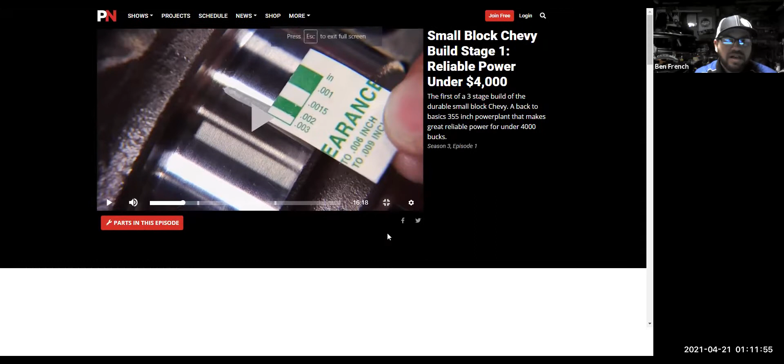So what are we looking at right here? We're deep inside an engine, looking at the crankshaft. I wanted to point out this little piece of paper and this smashed piece of wax - that's called Plasti Gauge. Basically we're measuring a thickness here that's somewhere between 2 to 3 thousandths of an inch, which is about the size of your hair. If you plucked a piece of hair out of your head and measured it with a micrometer or a dial caliper, it would measure somewhere between 2 to 3 thousandths. So when you're building engines, that's the size of stuff you're measuring.

So let me play this for just a real quick second. I know it's going to be a little choppy - we won't play more than 30 seconds or so.

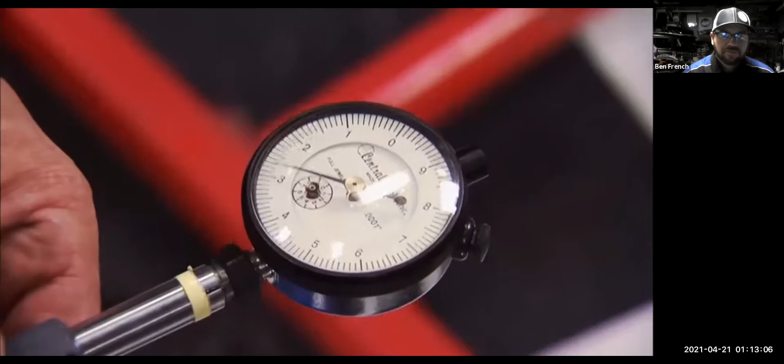Tolerance: our reading is between 2 and 3 thousandths. Now the crank comes out, and with the cap installed and the bore gauge set to the crank's journal, we'll verify the Plasti Gauge's accuracy. It measures 27 ten-thousandths, and that's within a half thousandth of our range.

The problem with a lot of these Saturday morning engine building or automotive shows is they do everything super fast and make everything look super easy. They do that to keep it entertaining and make it look like, hey, you could do that at home.

In this picture, this guy's got thousands of dollars worth of specialty tools. The engine he's building is a small block Chevrolet. In his hand he's got a dial bore gauge, and he's also used a micrometer. What I'm getting to is that if you're going to be building engines, a lot of people think it's just slapping parts together, but it's a lot of cleaning, a lot of inspection, and a whole lot of precision measurement.

So that's tonight's topic, precision measurement. It may not be the most exciting, but I'll tell you what is exciting is when you build your own motor and hear that thing fire up for the first time. It's like a life-changing experience. So whether you're the hot rod enthusiast doing stuff at home in your shop, or you're going to be a professional, if you're going to be doing work like this, you have to get good with precision measurement.

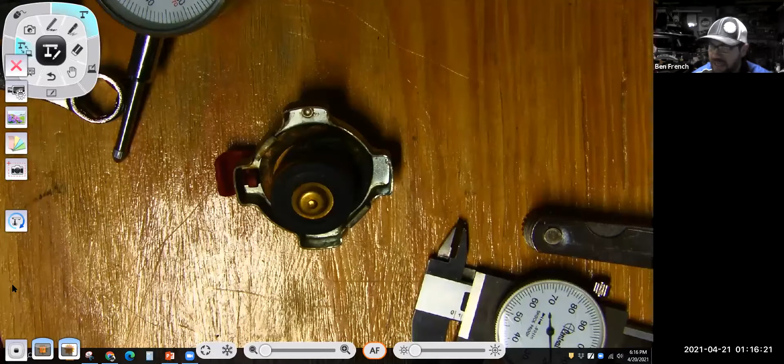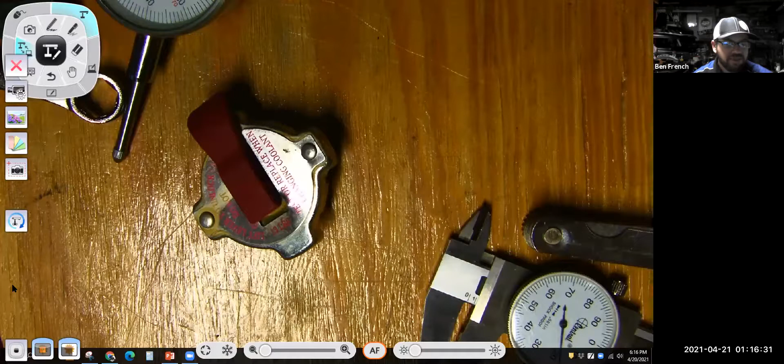Oops, look, I got something up on the screen. What is this right here, guys? What am I looking at? I saved this one just for you guys because we were talking about this last week or the week before. What is this thing right here, gang? You guys tell me. This thing, not all this other stuff. Not everybody at once now.

You're killing me. This is a radiator cap, okay? And I said if you're doing a cooling system inspection, always inspect your radiator cap, and if it looks sketchy at all, replace it. I also said I hate this style, with this little lever on it that you can lift up, because what happens is people see that - if I zoom in on it, you'll see it even says on there, lift up. And they see that and they go, oh, my car's overheating, oh, I'll lift up on this. Once you lose the pressure in the cooling system, it definitely begins to boil over and people burn themselves and cause all kinds of problems. So I would never recommend one of these styles of cap, especially for a customer's car, because it seems like it always creates problems.

Secondly, look at the gasket on the bottom of this. I actually had an issue where this was off of my Spec Miata race car and it was getting hot out on the racetrack. I was seeing the temperature increase, and of course this was back in January, February, so it was not hot outside, but the engine was running kind of hot. I was losing some coolant on the car - I could tell I was leaking, and when I looked in the radiator, I could tell it was low. So I figured, okay, that's why it's getting hot, it's because it's low on coolant. I was pressure testing the system, and I had bypassed looking at this, and that was a mistake. Once I realized, oh, this gasket's torn, that was my problem right there. The system would pressurize, it would blow through that seal, leak down the side, kind of leak where the lower radiator hose was, where the coolant dripped off the side of the radiator, and threw me for a loop. So if you're servicing your cooling system, if this cap looks sketchy, replace it.

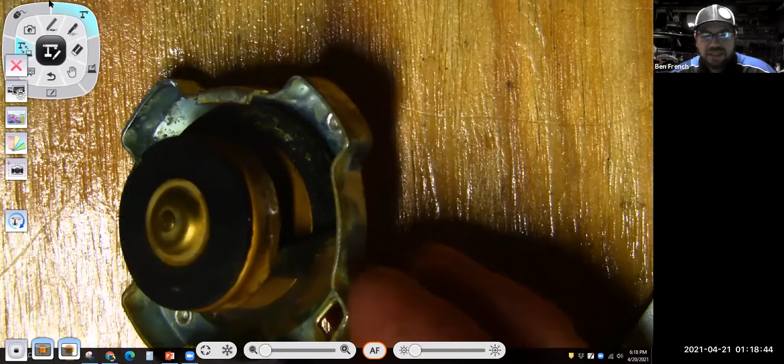All right, now back to precision measurement.

When it comes to measuring stuff, it doesn't hurt to start with a ruler. Let's get that up on the screen.

I grabbed this little one because it's a fractional ruler, not metric. It takes that inch and divides it up into 8 segments. So if I look at this, I'll start right here: 1/8, 1/4 of an inch, 3/8, 1/2, or you can look at that as 4/8, reduced down to 1/2, 5/8, 3/4, and 7/8.

So they've taken the ruler and divided it up into 8 sections. But in between those 8 sections, there's smaller sections. So there's 1/8, but right here is 1/16. And then below that is 32nds. So it's 1/32, 2/32 which is 1/16, 3/32, and 2/16 divides down into 1/8.

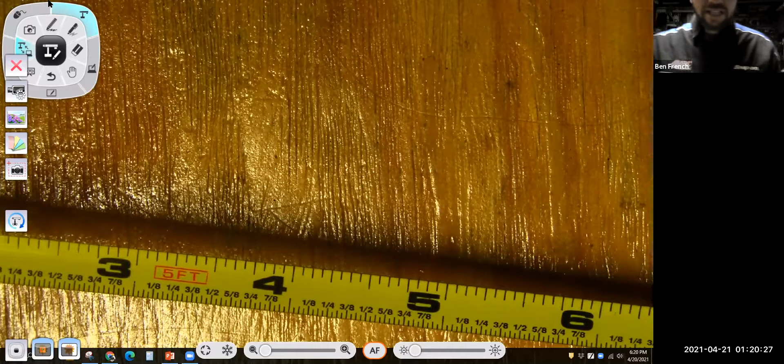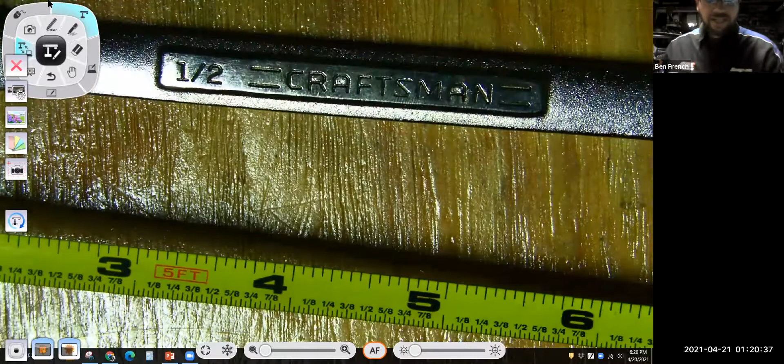The fractional system is kind of weird, and for folks who don't like fractions, that can be frustrating. But I want to relate it to a tool we've talked about, wrenches. Let's flip that over. That's 1/2, so that directly relates to that measurement right there.

Now this is your typical tape ruler. What I wanted to show you is if you're working in the machine shop, you're likely to carry around one of these, a machinist's ruler. If you're doing machine work, you measure stuff a lot, and you usually want a finer scale than your typical ruler.

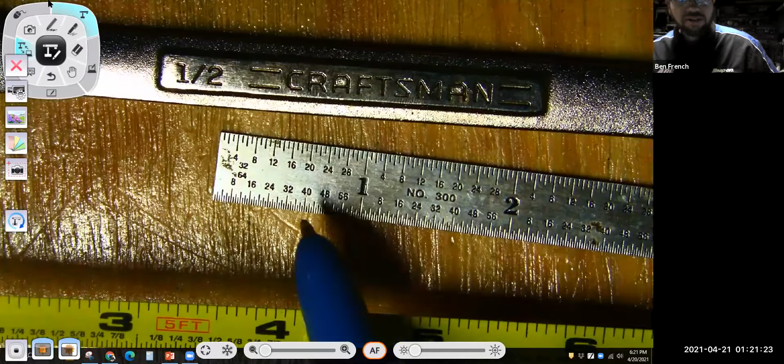The smallest scale this guy went down to was 32nds of an inch. If I move him over, he measures 32nds of an inch at the top, and the bottom scale goes down to 64ths of an inch. That's so small, without my glasses I can't even see it. But that's still a much coarser scale than some of these other tools I'm going to put on screen. I do think everything builds.

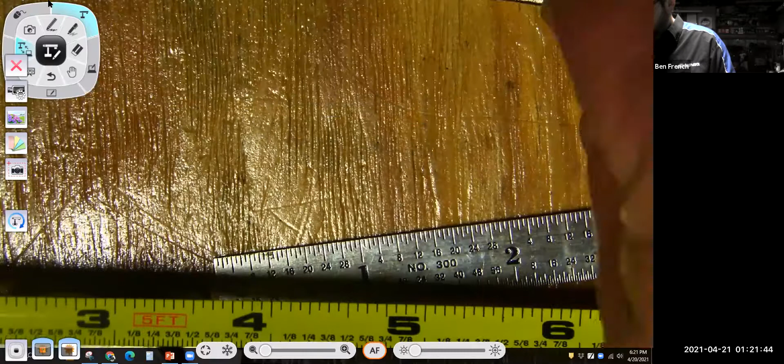One thing we do in machine work is take this inch fractional system—if you're working on import engines or other things, you might be using metric tools. But I also see a lot of machine shops that use a mix of both metric and standard, and the technicians, machinists, and builders just get used to using both of those things. So here I have a dial caliper.

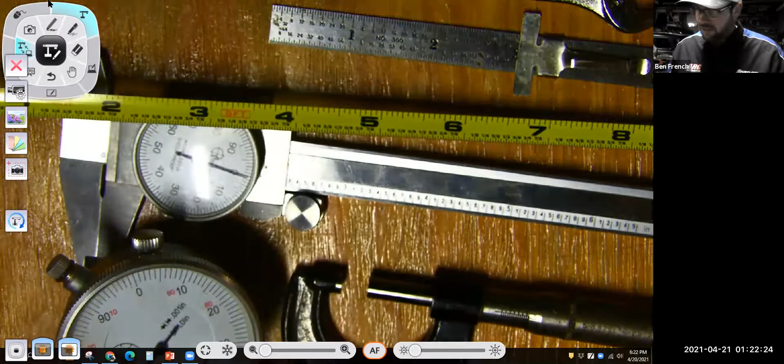And then below that, I have the infamous micrometer. So I've got a little bit of everything here. I also have a dial indicator, and all kinds of specialty gauges and stuff up there.

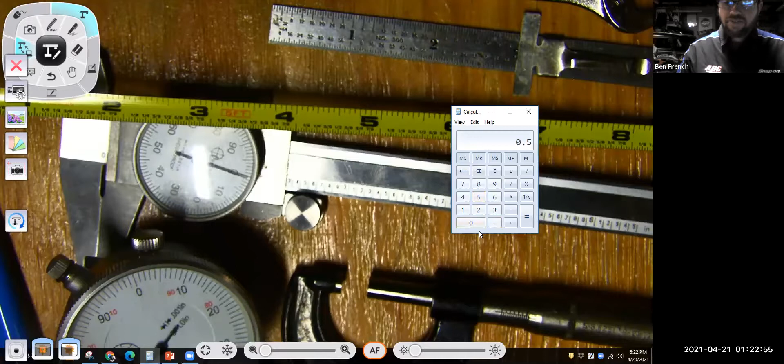Let me do one thing here while I still have the rulers up. I'm going to put up my calculator. If I take 1/2 and divide it out, 1 divided by 2, I get 0.5. Now I could also say 0.500, or we could say that's 500 thousandths of an inch.

So by dividing out the fractions, whatever they are, let's say it's 7/8 of an inch—that's 875 thousandths. Let's say it's 9/16—that's 562 thousandths and 5/10, or 5/10 thousandths, is how we would say that. In the machinist world, we typically talk about stuff being in thousandths of an inch.

How do we get from fractional, fractions like this or on our measuring tape, to decimal points? We just divide out the fractions. When you do that, it makes stuff a lot more straightforward. So let's take another one.

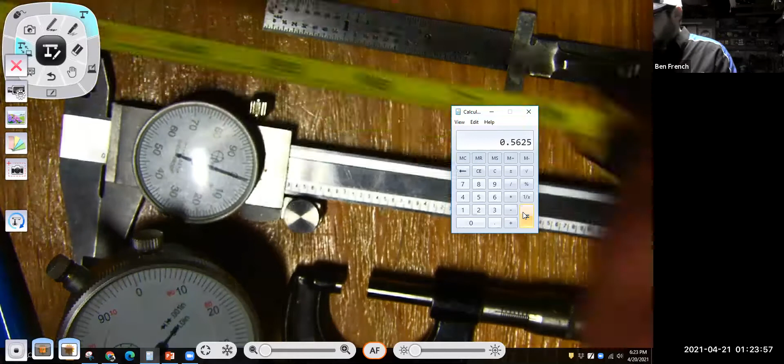Here I have a wrench that's 7/16. Well, what is that going to be? 7 divided by 16—okay, that's 437 thousandths and 5/10, or 5/10 thousandths. So that's how you get that to a decimal point.

Now I want to show you another trick. There's one magic number I have memorized over the years, and that is 25.4.

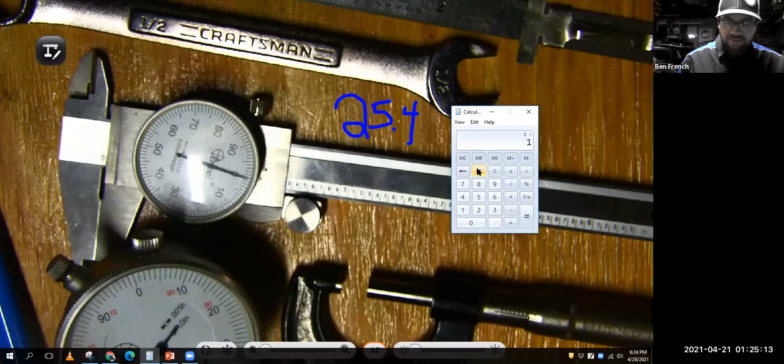Now, what's the deal with 25.4? Well, if I want to go from standard to metric, all I have to do is remember 25.4. So, for example, let's go back to our 1/2 inch. Is that wrench close to a metric size? Well, I don't know, let's divide it out. I'm going to say 1 divided by 2, or 1/2 inch. Oh, that's right, that's 500 thousandths. I'm going to multiply that by 25.4. And guess what I get? 12.7.

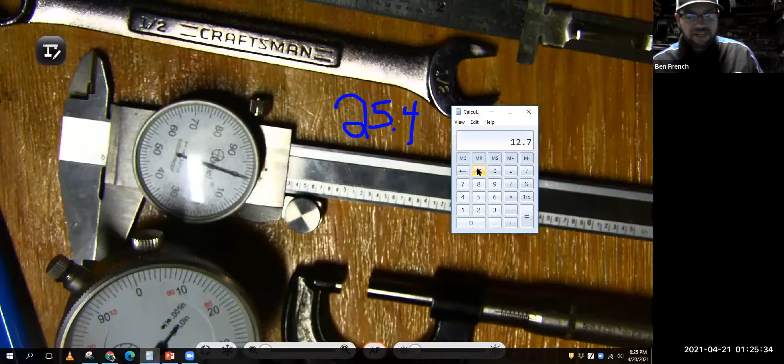Okay, 12.7. So you know what that is? That's really, really close to 13 millimeters, isn't it? And so what you'll find, if you can't find a 13 millimeter wrench in your toolbox, if you have a 1/2 inch wrench that maybe is a little bit worn, it will fit a nut or a bolt that's 13 millimeters. So that is my tech tip for you guys, is that there are conversions, okay?

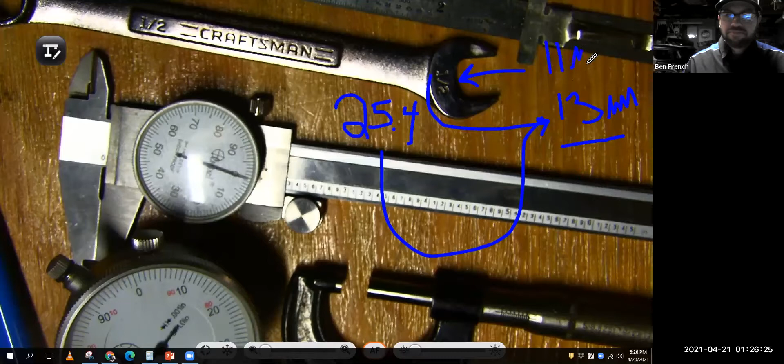And how do you convert it over? You just have to know what's what. So my most popular ones that I use are 11 millimeters, 13 millimeters, and 14 millimeters. I use these all the time. Well, how do I do that? Because if we do the math on them, let's say, for example, we'll go backwards now. We'll say 14 millimeters divided by 25.4. I'm dividing it instead of multiplying it because I'm going the other direction. And I come up with 0.551, or let's say 552.

Well, what's 9 divided by 16? 562. Okay, so 9/16 and 14 millimeters are really close. Likewise, 7/16 and 11 millimeters are really close. So a lot of times you can use those interchangeably. Another one of my favorites is 5/16 and 8 millimeters. Two sizes very, very close to one another. So if you're missing one size of tool in your toolbox, you can usually substitute stuff.

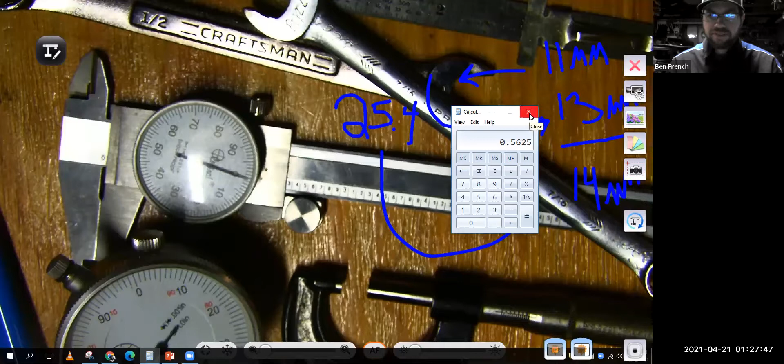So who says that math can't be a help to you, right? We're doing a little bit of fractions, doing a little bit of math, and it's good stuff. So let me clear out some of these scribbles now. And let's really look at our precision measurement tools, okay? So we got the ruler down. Hopefully you know, we even got the machinist ruler down.

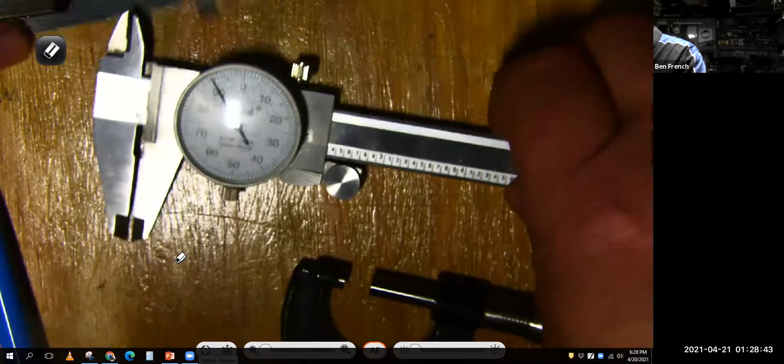And now let's look here at our dial caliper. I'm going to put him up at just a little bit of an angle here so that maybe we take a little bit of that reflection off the screen. He needs to be at more of an angle. Hold on, there we go. Well, I still don't know if that helped.

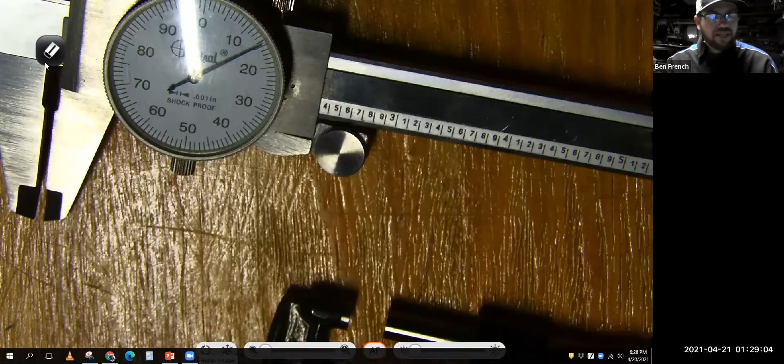So this is a dial caliper, and I love this tool because it does all kinds of measurements. In fact, if I move this guy out of the way, if you zoom in on it, and let's look right here, it tells you on the dial that it measures to the tens, hundreds, thousands. So this tool right here can measure down to the 1,000th of an inch, or 0.001, okay?

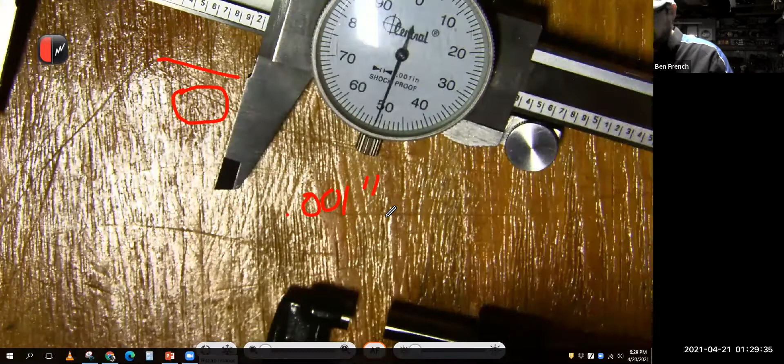But because there are some gear teeth and stuff in here, the way this particular tool works, I'll show you its gear teeth in there. Right there, there's a little bit of slop in the gears. And so what we say is realistically a dial caliper like this is accurate within, oh, maybe 2 to 3 thousandths, okay? So he can measure down to 1,000ths, but his accuracy window is a little bit bigger just because of the mechanics that make this work, okay?

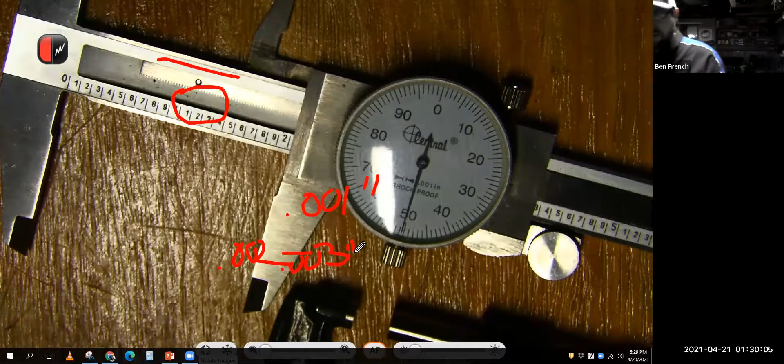But here's what's so awesome about this thing. If I erase those scribbles, get them out of the way, this guy does all kinds of measurements. So, for example, he can do an outside measurement like that. I can clamp down on something and I can measure it, okay? This guy is measuring at, this is right on the 50, but I'll clamp it down.

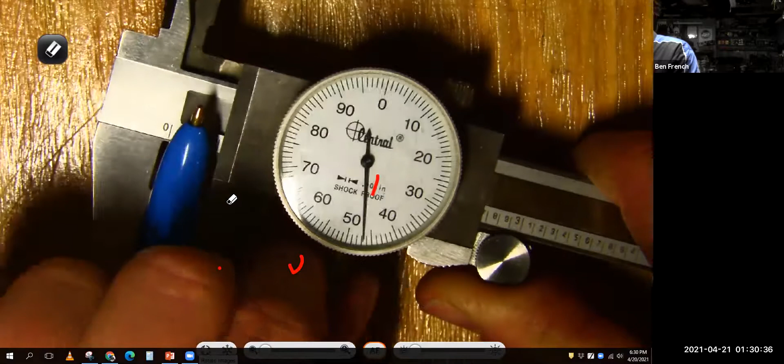Lock it in, take that guy out of there. So he's measuring at 1, 2, 3, 4, that's 450, 1, 2, 3, 453 thousandths of an inch. That's what he's measuring right there. That was the thickness of this.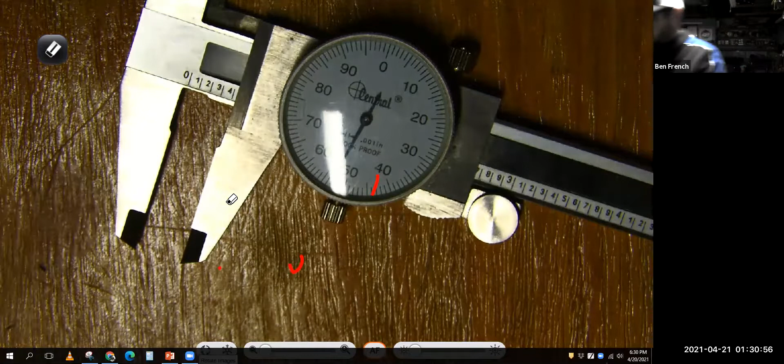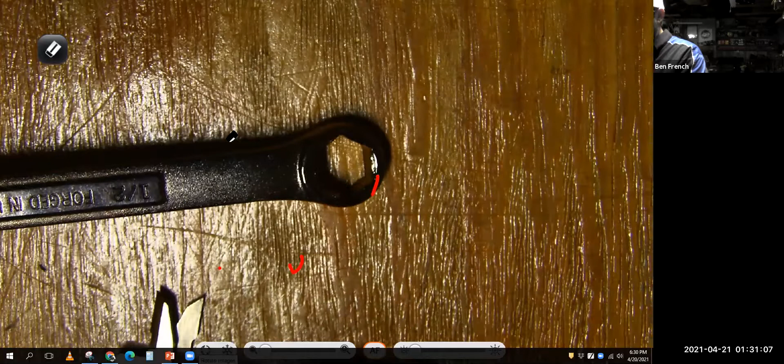But we can also do an inside measurement. So look, imagine this is like a precisionally machined hole and we want to measure how big that is. I can come in there and I can do that inside measurement.

So I can do outside measurements, I can do inside measurements, and I can do a depth measurement. Because on the end of this, it has a piece that extends, right? The tip extends, and I can measure how deep something is and get that measurement.

So this thing has three different types of measurement it can do. And here's a bonus one most people don't know about, it can also do a step measurement on this end. So there's really four different types of measurements you can do with a dial caliper, but it's only accurate within a couple of thousandths because of the mechanics involved.

Now, all that leads me back - let me do a couple of dial type tools. This is a dial indicator. So that was a dial caliper, this is a dial indicator. You can see that this dial indicator reads down to the 1,000th scale. That's the accuracy of that and how fine it can read. So each one of these little lines on this dial represents 1,000th of an inch, and one time all the way around the dial.

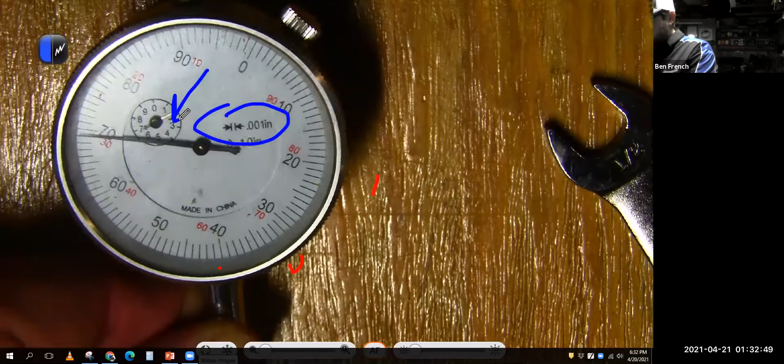So now I've gone around the dial twice, and what you'll notice is now I'm pointed at the 2 right there. So a trip around the dial is 100 thousandths.

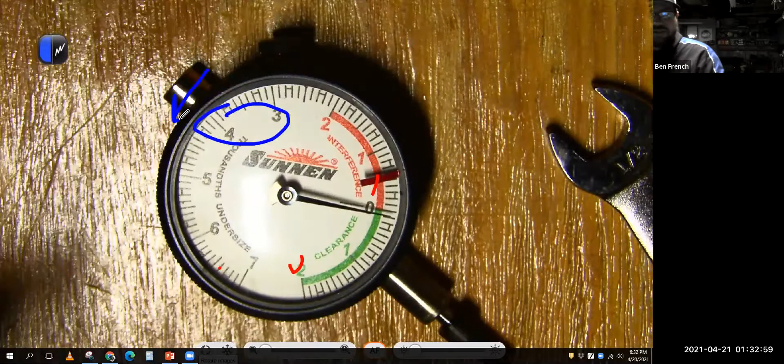Now, this is one of my high-end tools. We use this primarily for reconditioning connecting rods. This is off of our AG300 gauge. This is a very, very fine dial indicator. This guy measures - each big number is 1/1000th, which seems absolutely crazy.

But what that means is that this is 1/1000th, or 0.001. That is 0.002. So each little line in here, like this line right there, that would be 0.0011, or 1/1000th and 1/10,000th. So it measures down to the 10,000th size, and that's how accurate you need to be for something like a connecting rod.

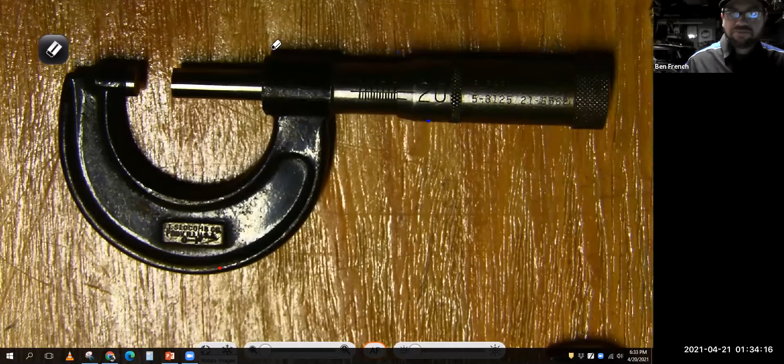So those are those dial tools. Well, what about the micrometer here? The micrometer is kind of like your go-to precision measurement tool. Like I said, a standard micrometer measures down to 1/1000th of an inch, and those thousandths are right on the end of this guy.

Before we get into reading it, we should talk about how does this guy work? Essentially, the mechanics of this, what makes it work so well and be accurate, are very simple - not different than that right there, a nut on a bolt. The frame of the micrometer essentially is the nut, and the spindle and part that you turn to do the measurement is the bolt threading in and out of that frame. So it just has a very, very fine thread pitch inside its nut and bolt.

So one thing I will say about a micrometer is that this is a precision measurement device. It is not a C-clamp, okay? It's a precision measurement device, it is not a C-clamp. Oftentimes what I see is that people will over tighten these things and they don't realize that the threads on the inside of the micrometer are super, super, super fine. And if you over tighten them, you will strip out the threads.

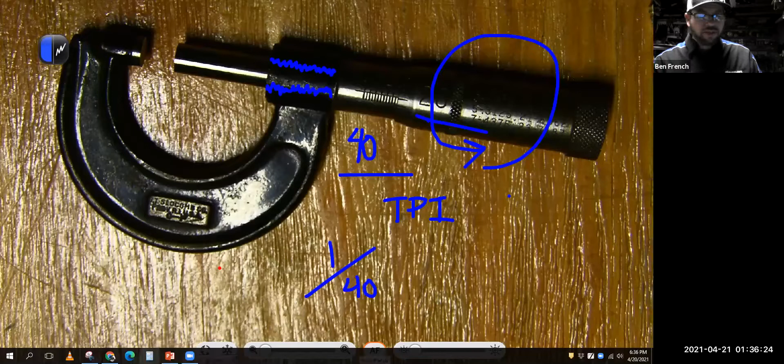Now, what's the thread pitch here? It's 40 threads per inch, or TPI. What that means is if this handle goes around one time - see how there's a big 20 right there? One trip around is 1/40th of an inch, because there's 40 threads per inch. Well, if you divide out 1/40th of an inch, let's do that - that's 25 thousandths.

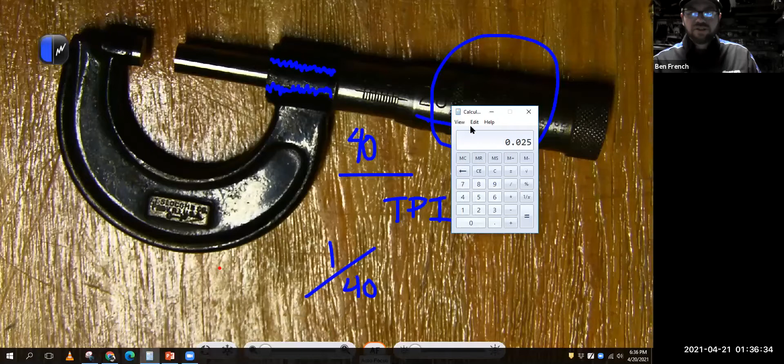So one trip around, it's not 20 thousandths, I haven't gone all the way around - one trip around is 25 thousandths of an inch. That's how this thing works. It's not much different than a nut and a bolt, it's just a super fine thread pitch, okay?

And if you over tighten a micrometer, what will happen is you'll strip out the threads in there. You could even flex out the frame of the micrometer. So again, there's a certain technique to using it.

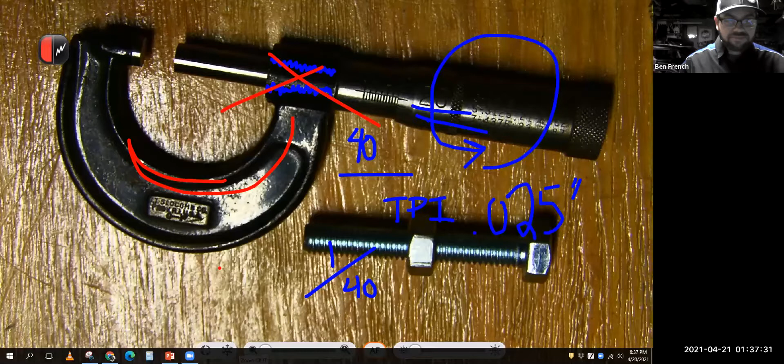Okay, these are all the parts. We have the thimble, and that's the part we put our fingers on. The thimble is connected to the spindle here, which causes the micrometer to move out. Let me turn on my annotation tools and get this moving. So as I turn the thimble, it moves out this spindle here, and that's getting my measurement.

My piece that I'm going to measure goes right in between the spindle and the anvil. That could be a telescoping or snap gauge like I have in my hand, or it could be an actual piece I'm trying to measure. That's where I do my measurement. It measures down to 1/1000th of an inch, or on special micrometers with the vernier scale, it'll measure down to 1/10,000th of an inch. So with that, let's keep going.

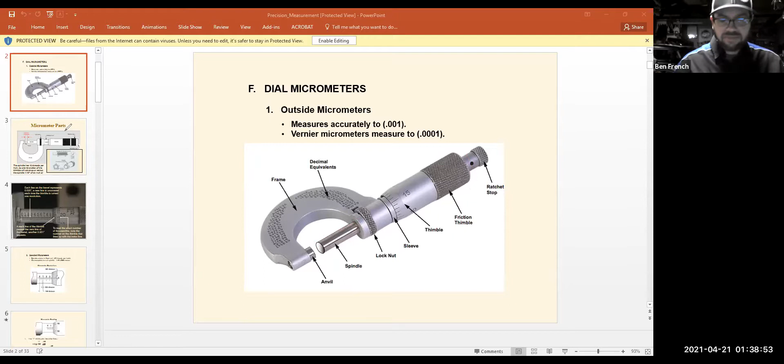So 40 threads per inch, I think we've already talked about that. That's 1/40th of an inch for each turn of the thimble. Now we got a really good look here. So with each line on the barrel - and this part here is the barrel.

Each one of these lines represents 25 thousandths. So 25 thousandths, 50 thousandths, 75 thousandths. Oh, one, that's 100 thousandths. Or you could say that's 0.1.

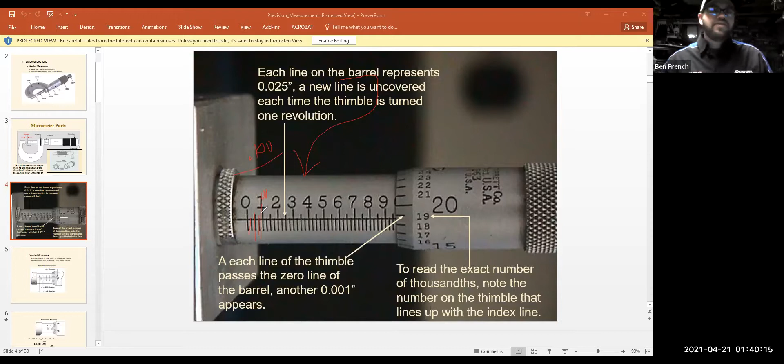So the way you measure stuff with a micrometer is kind of like counting money. That's how I relate it. If you've ever wanted to do a late night Taco Bell run and you're all out of money, and you start digging through your couch cushions for change - what do you do? You'd count dollars first, because that's the most amount of money. Then you'd count your quarters. And if you were getting real desperate, back in the day it was 59 cents for a taco, so it could be like I needed 4 more pennies to make that taco. Well, your pennies would be what's represented here on the thimble.

So here's how I would count it. I look for these numbers first. So on this picture right here, I see 9. Okay, so that'd be like my $9. Let's make that a little bit bigger. So I got my $9, right? And then I see 1, 2 lines, so that's 2 quarters. So 9.25. Now I'm up to

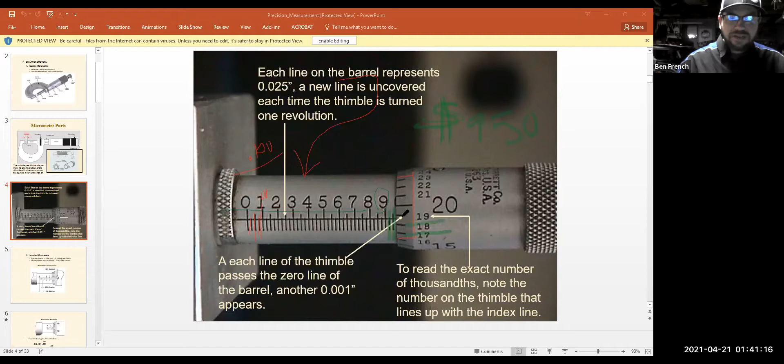9.50. Well, now I'm counting pennies, and I have 17, 18, just about 19 pennies, right? So I'll add 19 to this, and add it all together. So I got 5 plus 1 is 6. So I got $9.69 - but it's not really $9.69, it'd be 0.969, or 969 thousandths of an inch, is how you'd put this all together.

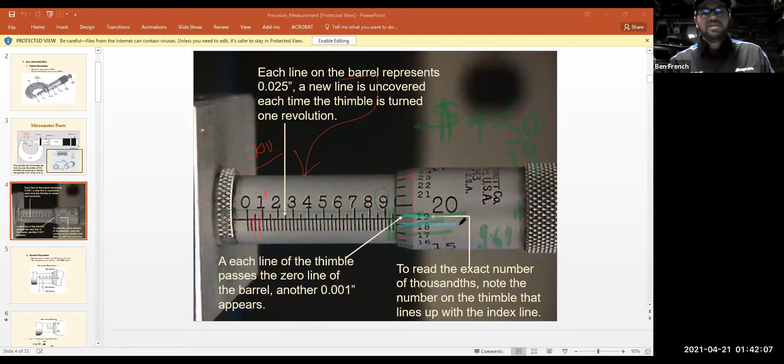Now, this guy actually happened to be right in between the 18 and the 19 here. If you look very carefully, 18, 19 is kind of in between. So he's really probably 968 thousandths and 6/10 or something is what it really is. And that's where, if you have a micrometer with the vernier scale, you get a little bit finer reading, and you can split up those thousandths.

Okay, so that's how you count it. It's like counting money, right? Count the dollars, count the quarters, and count the pennies. These are our dollars, these lines here are the quarters, and ultimately it's these lines here that are the pennies. And we just add them all together.

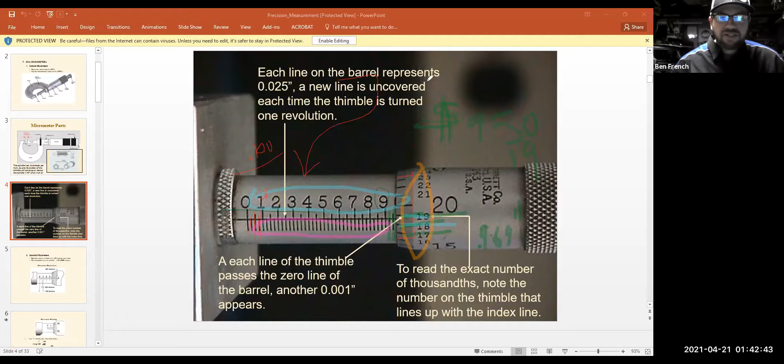So let me get rid of these drawings and let's do one of these together. So again, I got 1, 2, 3 - so that's $3, right? I'm going to put my text tool up there and say, okay, I'm going to be at 0.3. Now how many quarters do I see? 1, 2 - so that's $3.50. And do I have any pennies? Nope, that's on the zero. So there's my reading, 350 thousandths of an inch, or 0.350. Okay, that's how you would count that up.

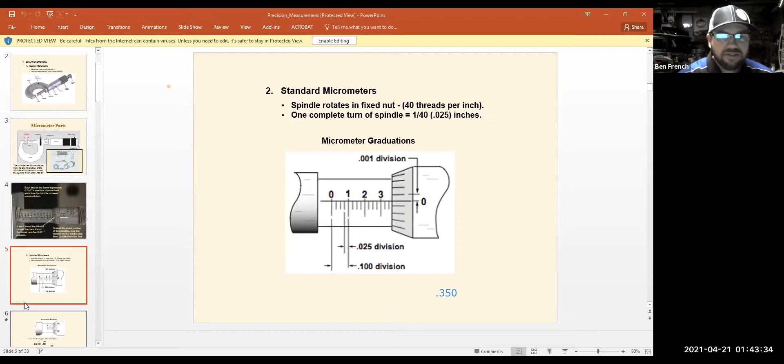Let's do another one. So I'm going to go to this guy here, and we will clear out the drawings.

All right, so how did we get there? Well, what we can see here is 1 quarter, 50 cents, 75. Oh, there's $1, right? 125, 150. So I got 150, which is what we're showing right here. Now, 10, 11, 12. So 12 on the thimble. I added it all together and got 162 thousandths.

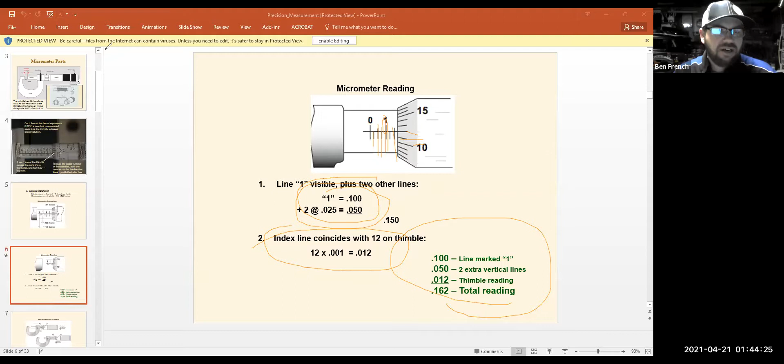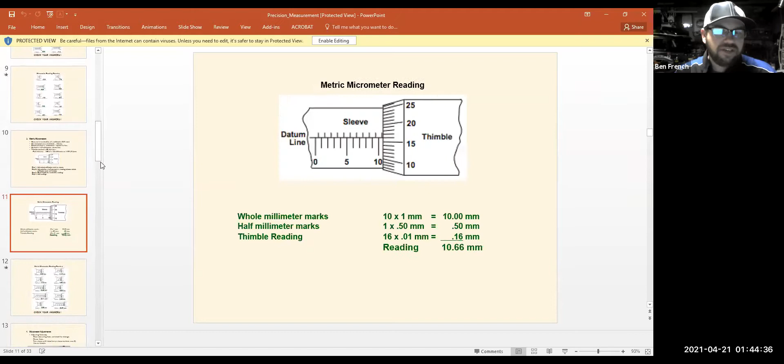So with that, let me change my screen share once again, because at this point I have several different examples and readings and stuff for you to do here.

And yeah, there's specialty digital micrometers. People always ask me about those. And here's the proper holding technique. There's a little friction ratchet stop there to prevent you from over tightening it.

But I wanted to point out for you what I have for you on Canvas. So I'm going to minimize that. I'm going to get out of some of this other stuff.

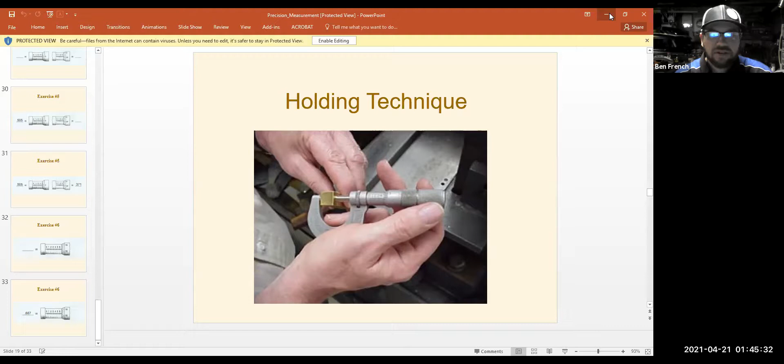Now what we're going to do is switch this back to our internet here, and at this point we're going to go back to our precision measurement. And what you'll see is I have a couple web links here that you can practice using a micrometer on. Nothing's going to be exactly like really using a micrometer, but we're trying to get the basics across here.

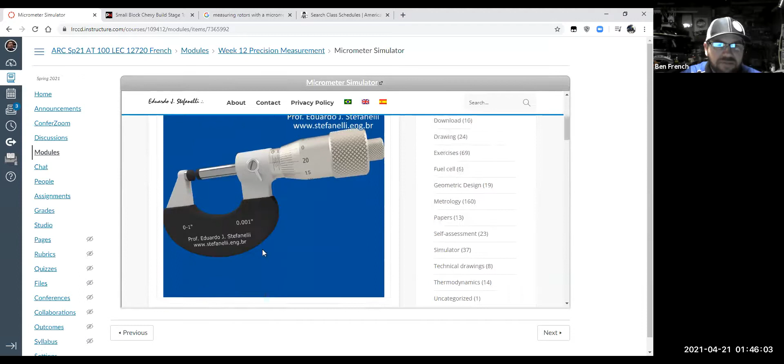So this is pretty cool. Here's this little micrometer simulator. What I can do is click it, and I can then grab a reading and figure out, well, what is it? I can practice adding it up.

So I see 8, okay, so there's 825, 850. Looks like just about 5 more, right? So just a smidge less than 855, because it's just underneath that. So maybe 854. And if you look at it, they even give us a little reading right there where we can read, okay, that's 854 thousandths and 7 ten thousandths, or 7 tenths. And they show us the vernier scale right here that breaks down those 10 thousandths.

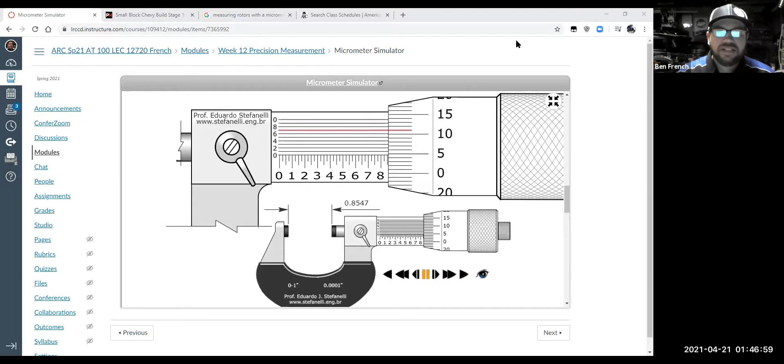So there is a pretty nifty micrometer simulator, but there's also a cool little dial caliper simulator that I grabbed for you as well. So it's a great way to practice with reading these. And, you know, the dial caliper is a super useful tool.

So I got a couple cool little simulators on there. I hope you guys like those.

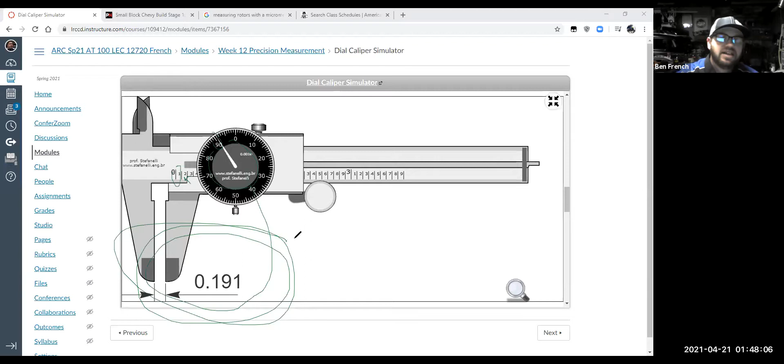And if you want to see the tools in use, like I talked about earlier, watch this video. They do a cool job putting together the small block Chevrolet engine. At the end of this video, they actually run it on the dyno and see how much horsepower it makes. And there's a list of all the parts that they use. So the idea is if you had a spare 350 engine block laying around, you could buy those parts, put together that motor, and if you do a good job with your build, you should make the same amount of horsepower that these guys make on theirs.

You'll see some of the measurement tools being used. Yes, they use them really fast, and it's a little bit harder than they make it look, but it's a great example of using some precision measurement tools.

Now, one place that we might have done some precision measurement work in AT 100 in a normal semester is we would have probably done some measurement intro when we did brakes. Because one common area that we measure with the micrometer would be to measure the thickness of our rotors. And somewhere around here, I have my rotor micrometer, or at least I thought I did. Here it is.

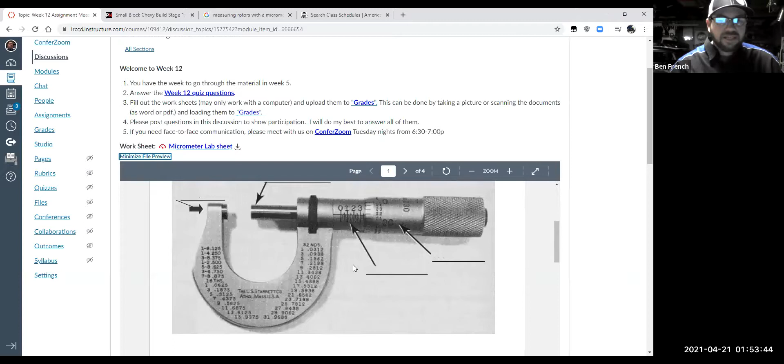I'm just going to download the form here, I think. There it goes. It has us name the parts of the micrometer, and it gives us some blanks for doing some different micrometer readings.

Just to give you a little bit of exposure to it. Obviously you're not going to be a micrometer expert with this worksheet. You're not even getting the feel of it, but you're at least aware of what a micrometer is, basically how to do the measurement. Count the dollars, count the quarters, count the pennies. We'll do a few more of those, and then it gets the basics across.

What I would love for you to do, maybe this fall, if you're going to take more classes with this, is take the AT 314 engine building course, because in that class you're going to take apart a V8 engine, fully reassemble it, build it up, and get it running by the end of the class. And you will get good at using all your precision measurement tools in that course.

I'm actually working on an advanced course where you bring in your own engine, and we not only build it, but we do some of the machine work here at the college, and you can get that thing fired up and running. That falls right in line with our performance program, where you could build your engine, get it running in your car, and then measure the horsepower it makes on our chassis dynos. So all kinds of cool stuff.

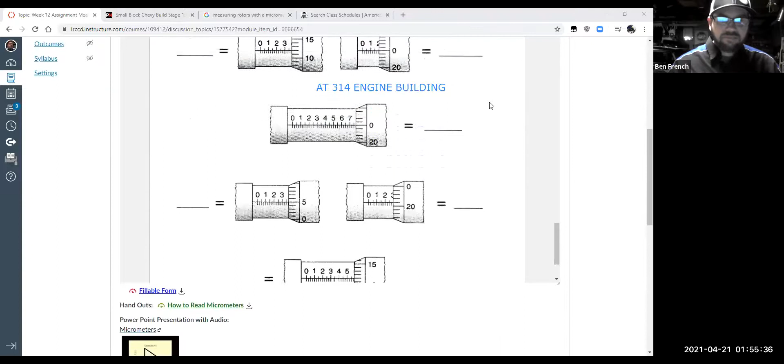So remember, a micrometer is not a C-clamp, and we always want to take care of it. I'm going to give you a couple of tech tips, but first let's answer a few of these questions for you here. I'll go down to the bottom of the page, and let's put some of these guys together.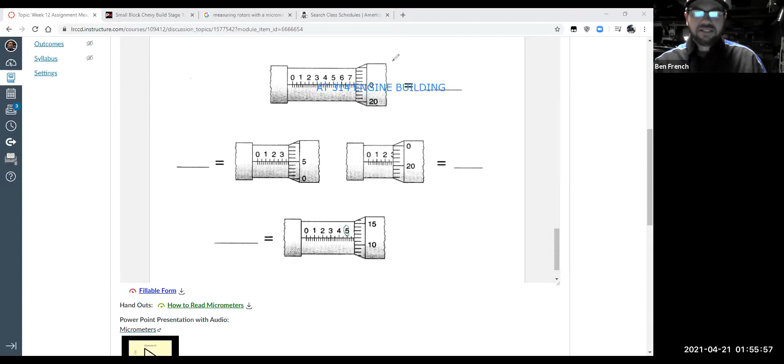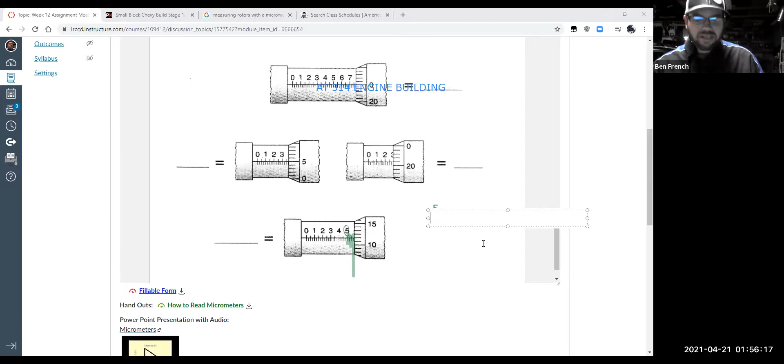Okay, we're going to change this one right here. Let's do this one. We see the number 5 right there, so that's going to tell us that we have a 0.5. But then after that, we see that we got 1, 2, 3 lines, so that's going to add on another 75, so that would be 0.075. Now we added on 75 thousandths, so we have a 0.5 plus a 0.075. Now we count on - well, how many thousandths do we measure here? There's 10, 11, 12.

So our last thing here is... and we add this all together. So we got 5 plus 75 plus 12. We add it all up, and we end up with 0.58... 5 plus 2 is 7. So our answer for this question is 587 thousandths of an inch.

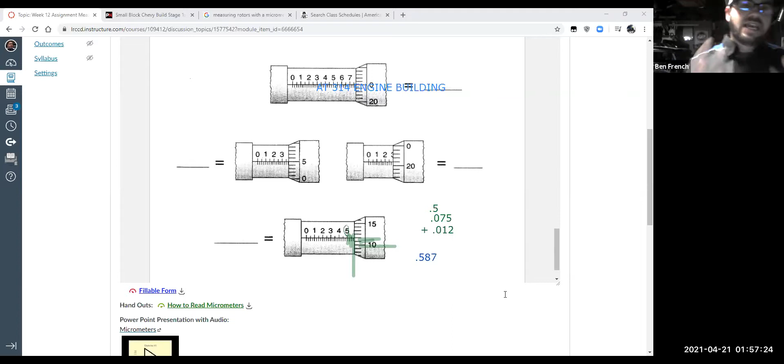Okay, so that's the process you go through to read these micrometers, and after a while it becomes really natural, like second nature. Again, it's like tying your shoes. When you were little, tying your shoes was difficult, it was a big deal. Now you can do it with your eyes closed just about, right? Well, you won't be able to do this with your eyes closed, but it does get to be very second nature as you do it over and over again. And if you end up building engines, that's how you'll get with it for sure.

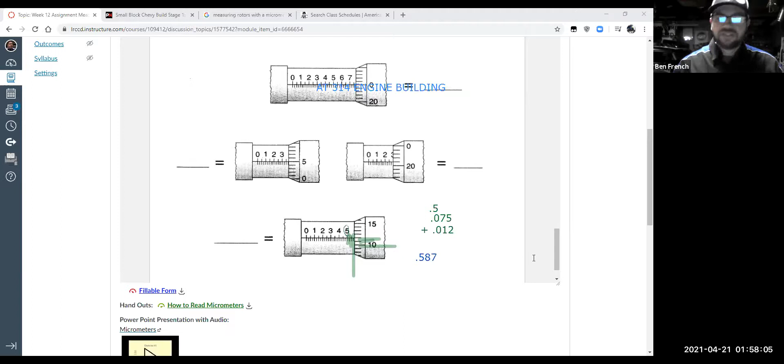So that's how we read our micrometers. But as always, I like to give you guys some tech tips, and we're going to finish off with a couple of tech tips here. Let me clear out these drawings. What we're going to do is go back to the document camera. So I'm going to do a new share, share the main screen, and we're going back to the document camera. There it is, all right.

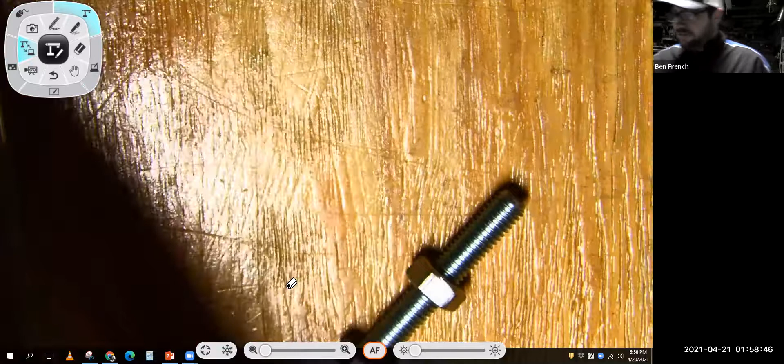So the first tech tip is, remember, nut and a bolt, that's how the micrometer works. Second tech tip is this is not a C-clamp, so don't make it too tight, you will strip out these threads on the inside. Third tech tip related to a micrometer, if you really have to roll it around, you can roll it on your arm, and that's nice and smooth, and it prevents you from over torquing stuff. Okay, and so I'll just keep doing that.

Fourth tech tip is this guy's off just a little bit. Before I do a measurement, I always see, does it line up? And actually, oh yeah, that one does line up. Now that I can see it larger on the screen, that is perfectly zeroing up. I would never store my micrometer that way. Okay, so fourth tech tip is always check to make sure that it zeroes out.

And the fifth tech tip would be don't store your micrometers this way, because believe it or not, this thing will heat up, and when it heats up, it expands, and that alone, storing it that way, can throw it out of calibration. So if I go to store my micrometer, I'm going to always open this guy up a bit so that I don't end up throwing my micrometer out of calibration. Okay, now, so there were 5 tech tips, but we're leading on to more than that, because what I have right here is a set of feeler gauges.

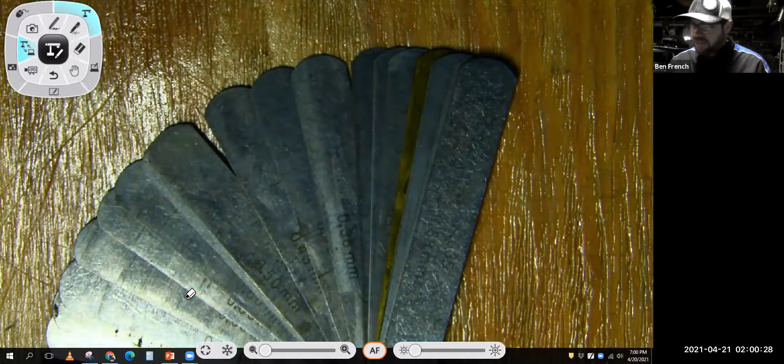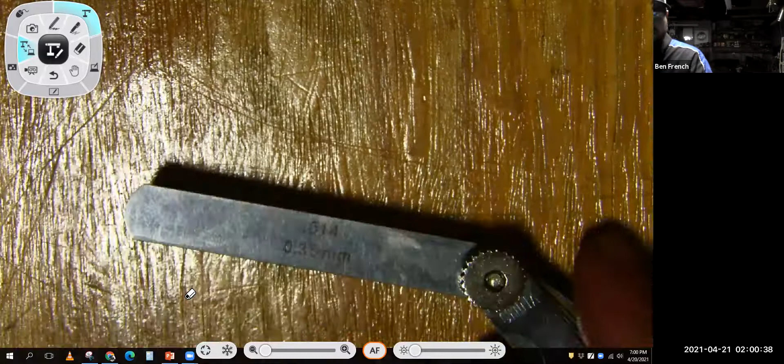Now, feeler gauges are thin strips of metal that are machined to precise sizes. So, for example, that feeler gauge has been machined to be exactly 14 thousandths of an inch, or 0.35 millimeters. And we can use that feeler gauge to check the accuracy of our micrometer and our readings. So I'm going to put that feeler gauge right there. And in that engine video that I linked for you, they actually use feeler gauges to check the piston ring end gap. We're going to come down and do our measurement here, and we're going to see, is that down at 14 thousandths? My goodness, I think it is, because here we're at 15 thousandths right up here. But when I look at where those two lines intersect, yeah, that's right at 14 thousandths.

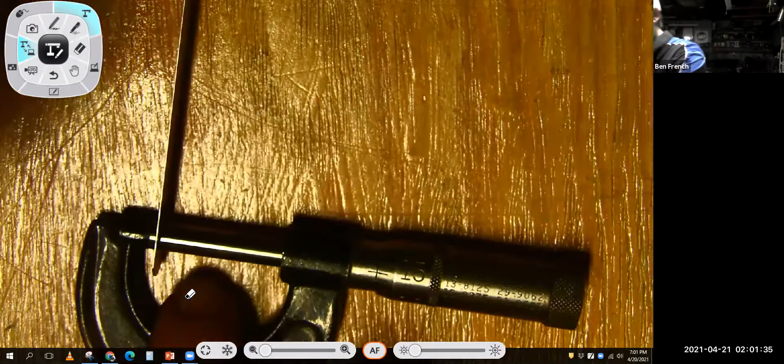So I can use my feeler gauge set to develop my feeling for using the micrometer and to train myself, kind of like I gave you those links to websites with virtual micrometers. Well, if you want to train yourself on a real micrometer, you can do that with a good feeler gauge set. And this one, you might think, well, what do we use these for? When we have precision measurements that we want to take that are in between components, that's what we would use a feeler gauge set for. So a common thing is valve clearance adjustment. If I'm adjusting valves, I'll be using a set of feeler gauges to do just that.

Okay, so hopefully that made some sense to you. I'm going to change the screen share again, and this one I'm going to bring back to our internet page.

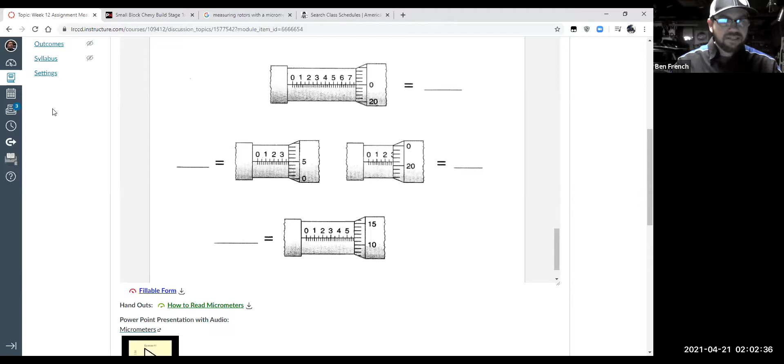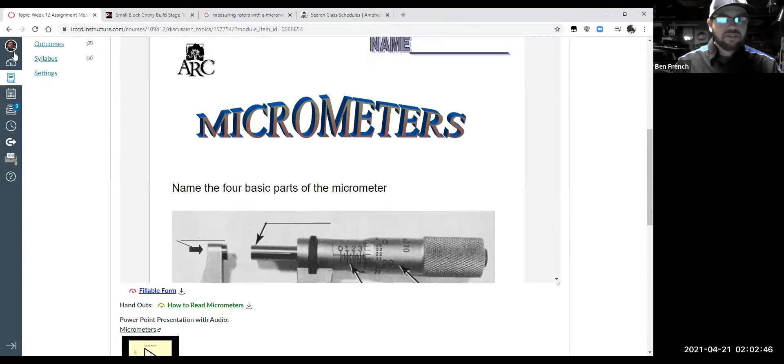So on our assignment, we have some quiz questions like we always do, and our micrometer worksheet. I already gave you one of the answers, and you can see it's pretty straightforward. There are some great video clips on how to use a dial caliper and how to read a micrometer that will fill in any gaps I might have left in our conversation tonight.

We even have some stuff in millimeters, so if you're a big fan of the metric system, we can show you how to use metric micrometers and calipers. We even have a vernier caliper on here, so all kinds of measurement stuff. If you're interested, you can go through those, get your readings down, and get some exposure to precision measurement.

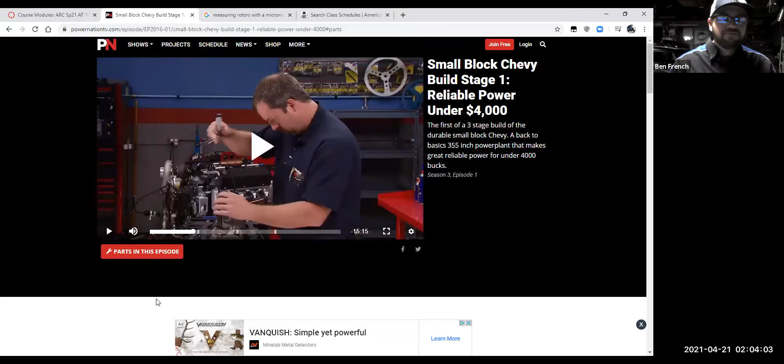Like I said, if I go back to our module, and I also put this in the class announcements, under week 12 I've got that building an engines video linked up right here. They do a really cool job putting that thing together, so I hope you enjoyed that and got some exposure out of it and some tech tips.

I know precision measurement doesn't seem really exciting, but like I said, through precision measurement you can build some really exciting things. That's for sure.

Now next week we're going to be getting into fasteners, and then the week after that we're into some thread repair, and then finally we get into some electrical diagnostics and some OBD stuff.

If you guys want to get into some of this stuff, I certainly encourage you to. There's all kinds of great multimeters you can get even at your local auto parts store, like this one right here, that do a great job with basic electrical measurements. And with OBD, there are all kinds of neat scanner adapters, like this little Vgate one here, that works really well with Android phones that you can use to scan your computers and stuff in your car.

In fact, in my scanner class we're using interfaces like this and the car scanner app to diagnose problems in our engines. So if you have a check engine light or something like that on and want to get started ahead, work on that stuff now, pull some codes and data, and want my advice on it, I'd be happy to use your car as an example for our class when we get there. Okay, so that's a little look at what we have coming down the road.